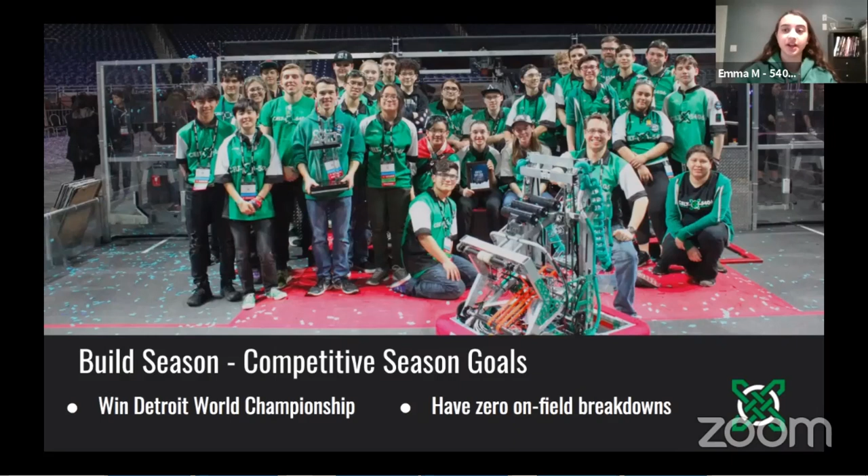Hi, I'm Emma. I'm in grade 11. I work on design and manufacturing, and I'm also the operator.

This year our team had 2 main competition season goals. Every year our goal is to be one step further than we did in the previous season, and last year we actually had a goal to make it to Einstein's.

Not a lot of people know this, but after Ontario District Champs, I decided that we were going to win Worlds, and nobody took me seriously until we almost made it there. Unfortunately we didn't, but that became a goal this year.

To field the most competitive robot we could, we also have a goal to have 0 on-field breakdowns. We do this by systems checks before every single match to make sure we don't miss anything and our robot is running as smoothly as possible.

Go on to the next slide, please. So the workspace that we build out of is the Robodrome, which is a shared build space given to us by our board. It's outfitted with a full machine shop and a nearly full-size practice field.

We worked closely with the school board to outfit the Robodrome and shape it into what it is today. We secured grant money and outfitted the machine shop with a bunch of complex machines, like a CNC mill, a router, a laser cutter, stuff like that.

Since this building is a shared board building, it serves as a workspace for the multiple FRC teams in our board. However, we invite teams from all across Ontario to come and practice with us and use our facility. All we ask of them is for them to bring us a team shirt, and we will display that on our t-shirt wall. As of now, we've collected over 20 t-shirts.

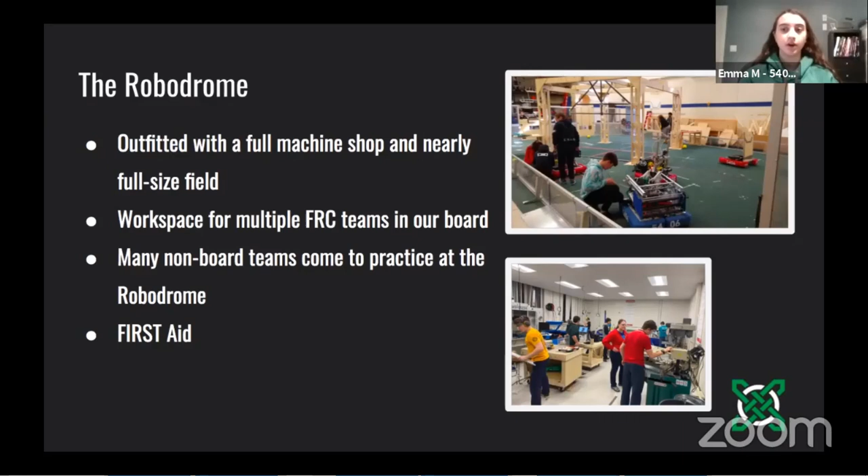Yeah, we definitely encourage teams to ask for help when they need it. For the bigger machines, if you're not trained, it would probably be one of our teammates helping make your part, just for safety reasons. Either way, that's a great option for teams, so thank you for doing that.

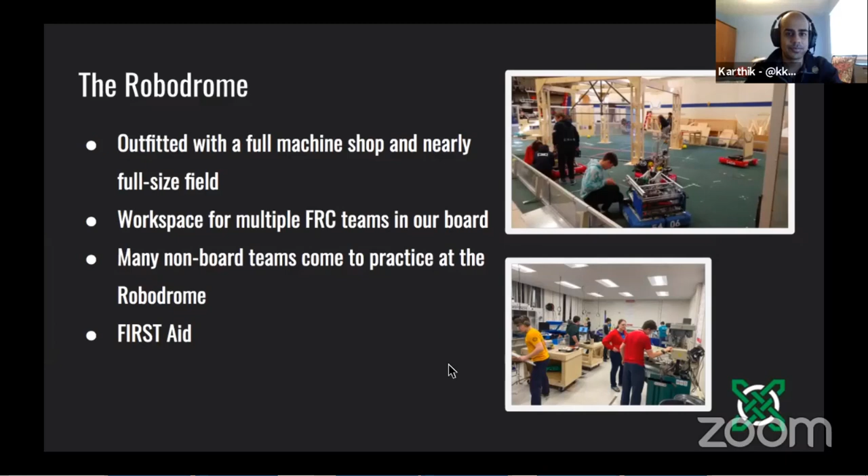Hello, I'm Andrew, also in grade 11. I do mostly mechanical and design.

Going into build season, our main strategy is to first figure out all the rules in depth about this year's game and how it can be played, in order for us to be able to try and figure out every single possible play or cycle the robot can perform during a match. Then we try to figure out how valuable that cycle or play could be based on how much time it takes, how many points it gets us, and how difficult it would be to do.

In order to do this, we also have a human game to make sure we understand it fully. We have 3 tiers of robots, with our teammates acting as the robots: the Brave Little Toaster, an average Ontario team, and a World Championship winning team. We figure out how they would affect their alliance scores, what kind of robots they would be, and how they would play the game.

This year, we estimated an average game would be around 80 to 100 points, and we hoped by the end of the season we could contribute 150 to 200 points to our alliance.

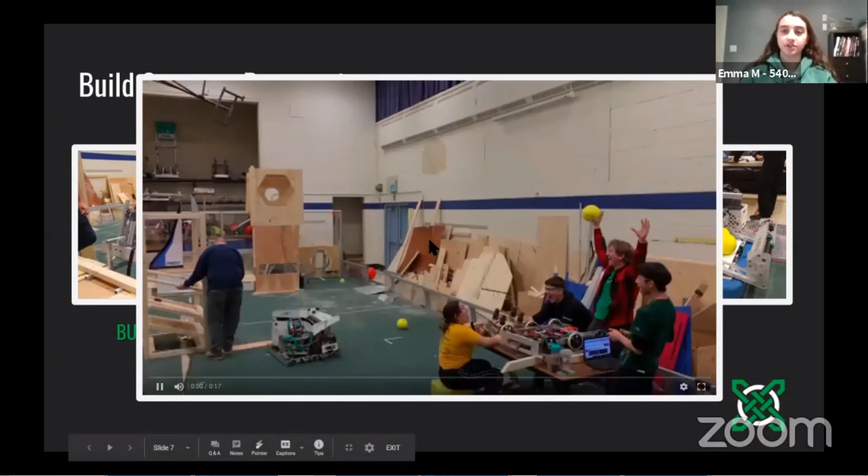If we could play the video: this was on, I think, day 4, the first time we got a power cell in the inner port. By day 5 we were prototyping our hooded shooter.

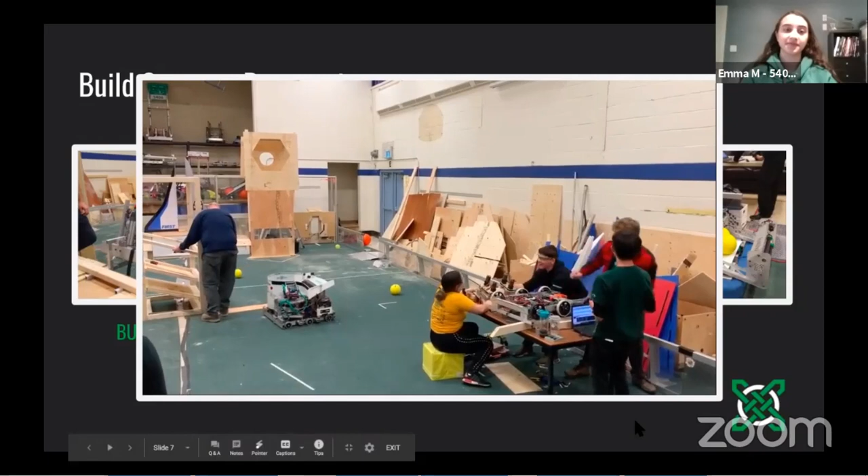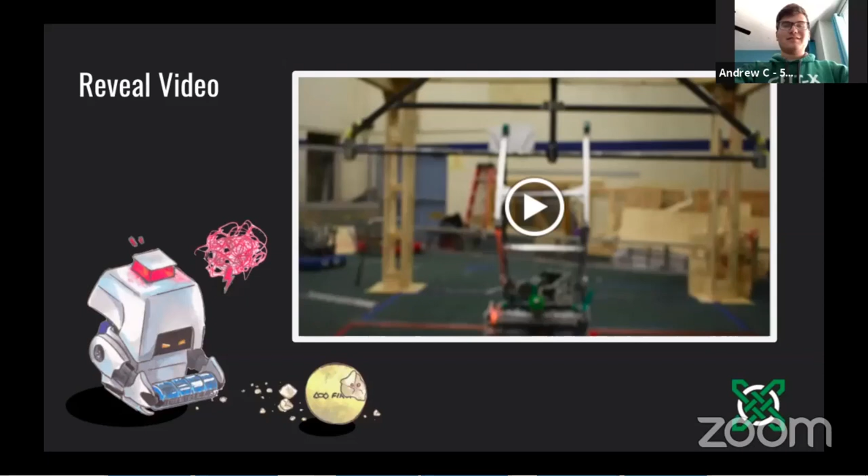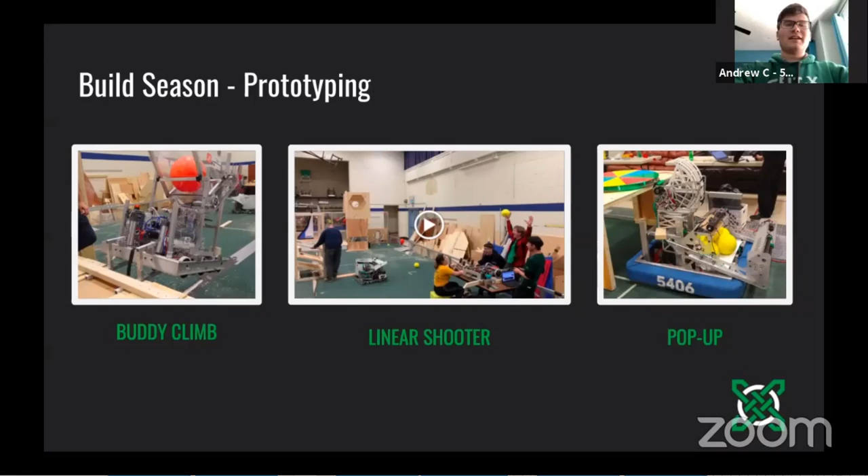One of the last main things we prototyped was mounting our shooter on top of a lifting mechanism, in order for our short robot to be able to shoot over the top of the control panel into the power port. After further design, we realized it was a bit too difficult to fully incorporate into our robot. It was also a bit heavy and we did not have the weight for it, so we decided to go with a simpler option of just driving under the control panel a few more feet to get similar time shots.

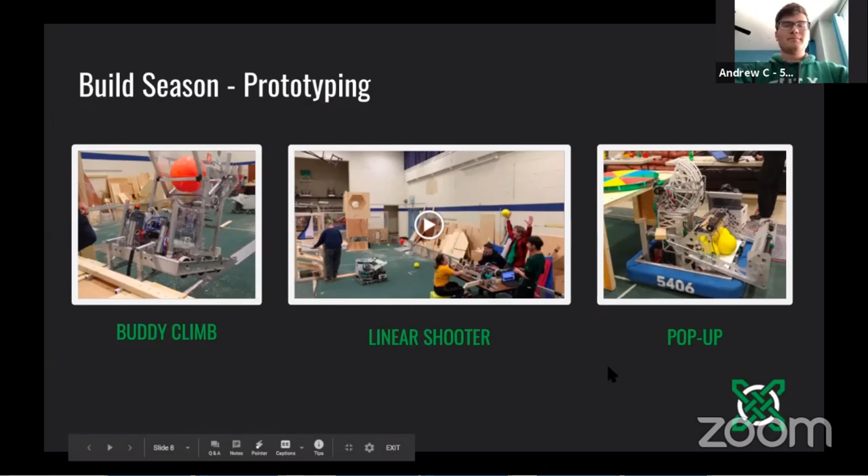This is our reveal video for this season. We named our robot Mo because it looks like the microbe obliterator from WALL-E. There's a little picture there.

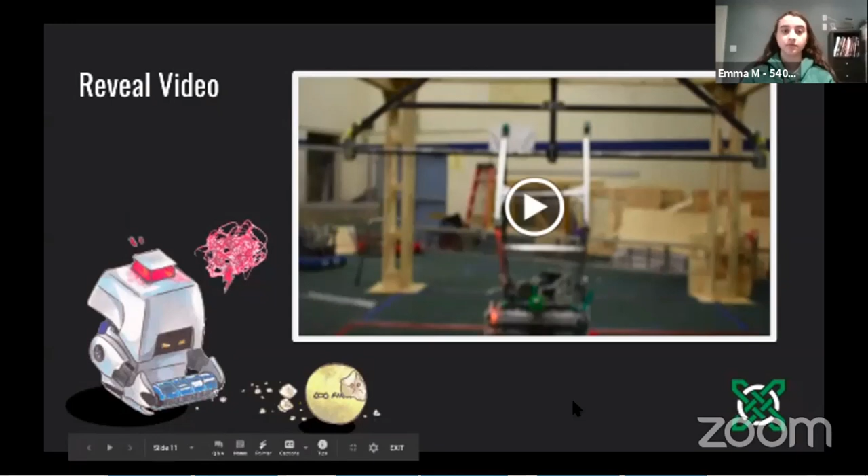So that was our 2020 robot, Mo, and we're just going to be going through Mo and talking about some of the mechanisms that can be found on Mo, except for the color wheel spinner, because that didn't quite make it on in time.

Victoria, I want to share one comment we have from chat: I thought you named your robot after the superintendent from the HWCDSB who's responsible for robotics and STEM. That comment is from none other than your superintendent, Morris. Thank you, I think it's a pretty good story—I think you should go with that one. Oh, man.

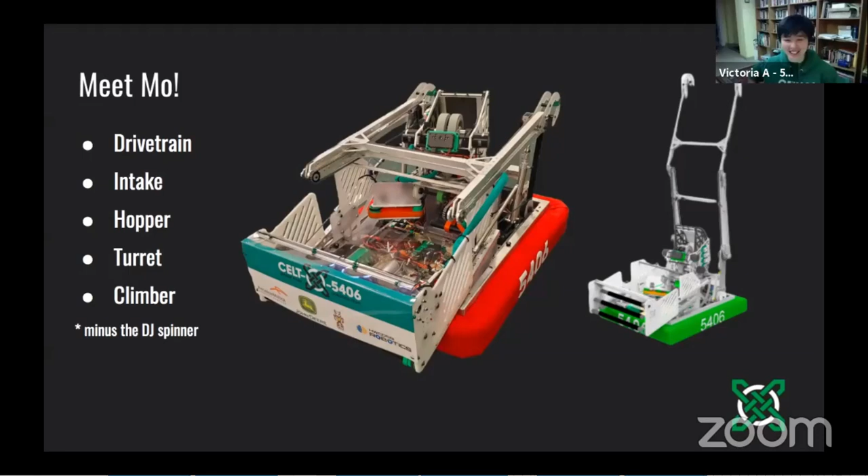Okay, so this year's drivetrain is a 6-wheel single-speed West Coast drive. It has four NEO custom gearboxes, and our gearboxes and rails were made on our CNC router.

Danny demanded this year that we have base lock since it's a shooting game. If you're not familiar with what base lock is, it's when you set the wheel PID to continually correct for the last position you were in. So if you get knocked around a little bit, the wheels will continually try to correct to where you were last, so basically the drivetrain is locked. This is useful for shooting and to combat defense—you don't want your shot messed up while getting defended. So base lock is just a way to combat that.

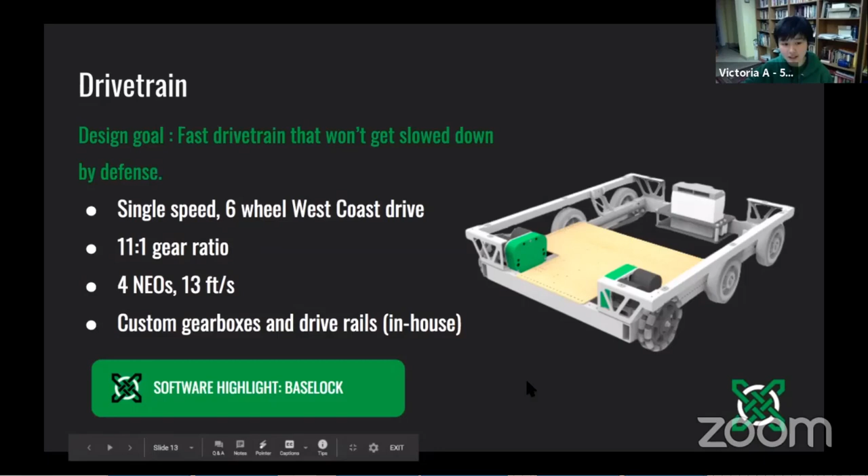Our goal when designing the intake was to make one that can efficiently pick up as many balls as it can in a short amount of time. What we came up with was a full width intake that can pick up 3 power cells at once. It's cut out of HDPE plates laser cut in-house, featuring custom 3D printed pulleys mounted on our rollers. Our intake also moves in and out using pneumatic cylinders and bearing sandwiches, which allow it to extend out and intake from the loading station.

We pulse the rollers while we're shooting for two reasons. One, so the balls don't get jammed—they get to shuffle around a little bit. Second, our hopper is just gravity; it's slanted into the robot, but there's nothing actively pulling the balls deeper into the feeder and into the turret. So we need to pulse the rollers to push the balls back there.

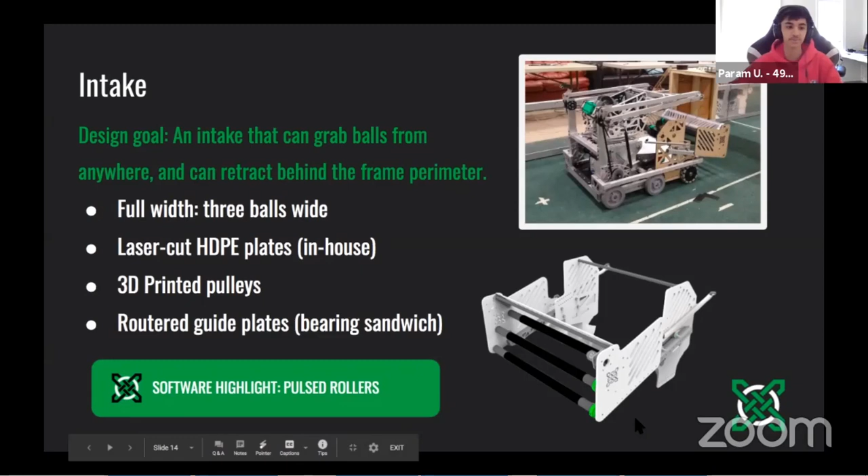I just wanted to mention a point brought up in the chat—it says this was the most redesigned part of the robot. Want to shed some light on why that was? For the most part, it was trying to make sure the power cells weren't getting jammed. A lot of our original designs had issues with power cells jamming on the side parts of our intake where it leads into the hopper, as well as efficiently getting them through the hopper into our shooter. So we had to spend a good few weeks constantly redesigning and making minor changes to it.

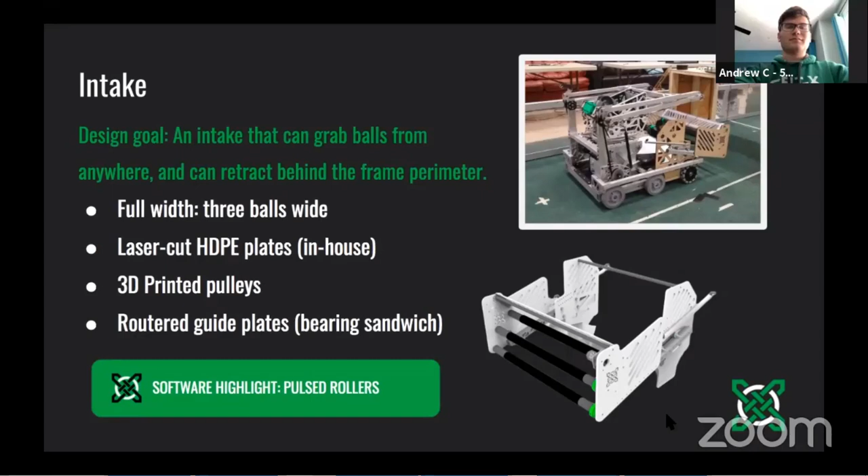At first, when designing our hopper, we decided to test out using brushes. After multiple attempts of trying to get them to work the way we wanted, they were slowing us down quite often, and sometimes the power cells would get jammed between the brushes. So we decided to remove them in our final design, as we were able to run without them.

In order to avoid jamming power cells when feeding them to the turret, one side of our serializer actually spins 10 times faster than the other, so that one ball is pulled in at a time. Our feeder is actually two parts: a wheel that pulls the ball in from the serializer, and powered rollers that prevent jamming. It used to be a Lexan sheet, but the balls like to stick to the sheet and each other, so powered rollers prevent that.

Our feeder is also velocity controlled. We don't pass the balls when the flywheel isn't spinning up or actively powered, because then it just jams. We also have a security mechanism where we limit how quickly the balls pass through the turret, and since it's velocity controlled, it limits the max RPM rate.

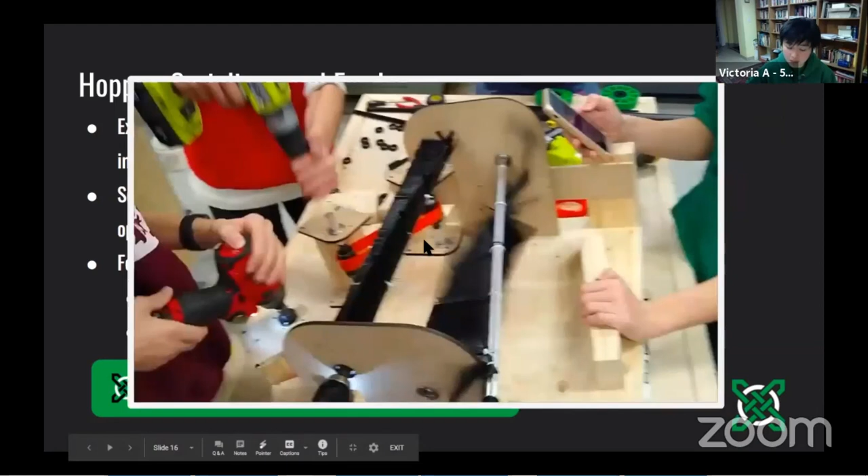One. That one had like a bit of...

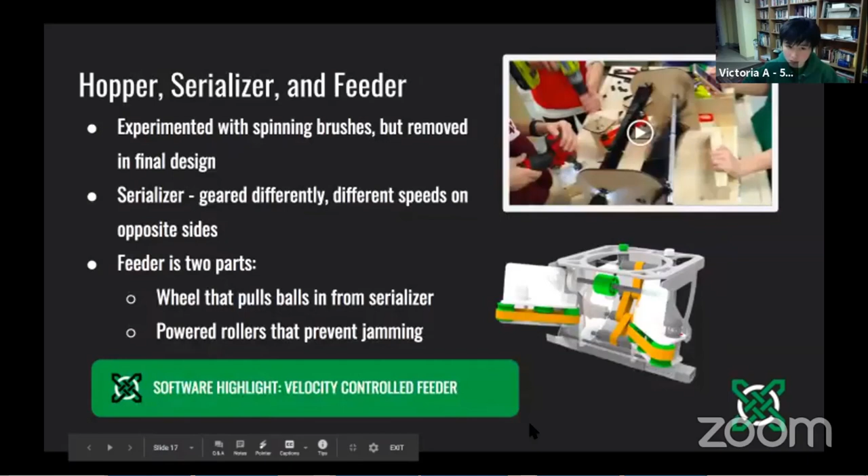So the cool thing about our turret is it's basically all made in-house. We have the delrin on the sides laser cut. The aluminum plates at the bottom are made on our CNC router, and we have the motor controller and limelight mounts that are 3D printed.

We have about 300 degrees of rotation and about 90 degrees of hood motion.

So the turret has the coolest software stuff by far, I think. We have two absolute encoders, one on the turret itself and one on the hood. So if we brown out or lose comms for a moment, we can always find our zeros, and we can find our zeros from any arbitrary location.

We also have auto targeting with the limelight. We have a quadratic regression, so we can find the hood angle and RPM of the flywheel from anywhere on the field using the TY value from the limelight.

And we also installed soft limits. So we have about 300 degrees of rotation, but that's a conservative number, because we installed the soft limits to make sure we don't break our umbilical while we are turning the turret.

It's worth noting that we could actually turn 360 degrees if we wanted to. It's just a matter of extending our umbilical, because in our practice bot we can turn 350 degrees. So that's something cool about that.

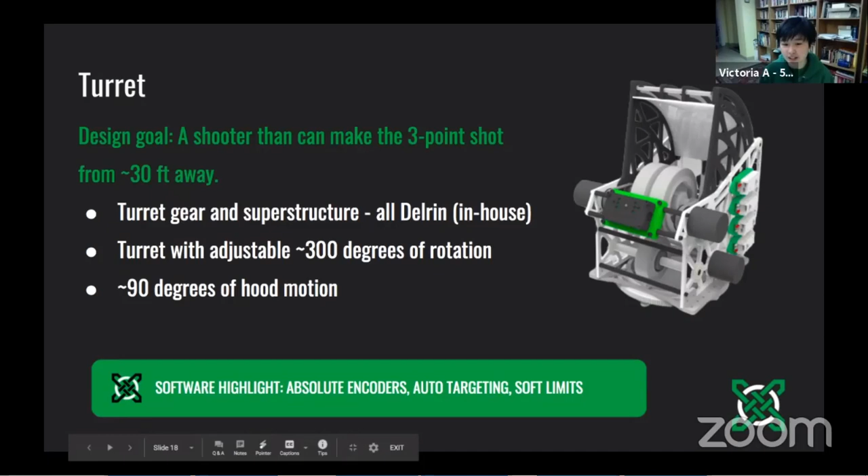Originally we had two individually powered linear bearing arms, but they didn't package well and were on the heavy side. They weren't working the way we wanted them to. So instead we have a virtual 4-bar linkage, actually powered by only one Neo because we ran out of motors on our robot, and it locks with a bicycle brake, which we took from our 2015 robot.

So we actually have an automated climb. Do you want to play the video? The driver just has to line up to the switch and then press a button, and the arms go to an arbitrary height.

Then the operator from there can adjust the arms and press another button and we're climbing. So that's our automated climb, but we also have a manual climb just as a backup. This is also to achieve our goal of 0 on-field breakdowns. It's good to have the manual just in case the automated fails for some reason.

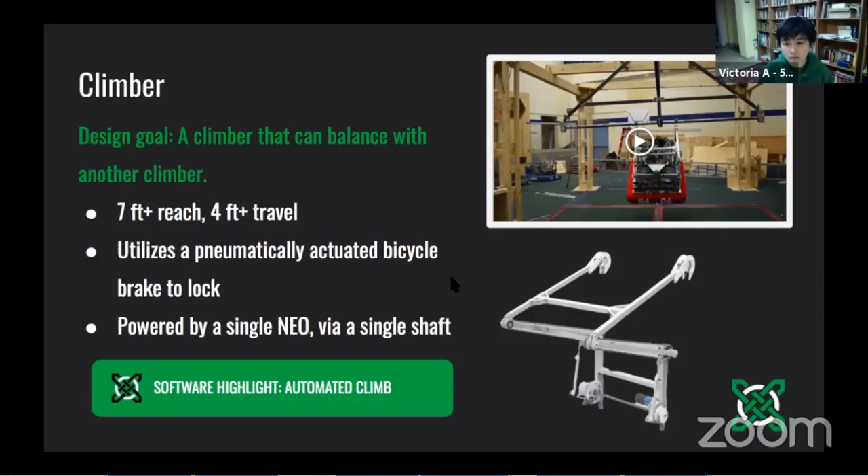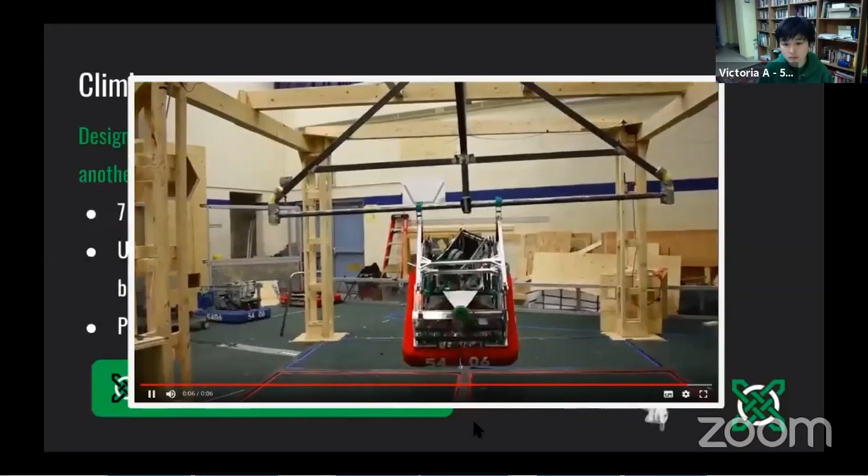So here are a bunch of electrical things that we think are cool and really want to highlight. In 2018, we stopped using Anderson connectors on our CAN because we used them out of spec, and that caused two different failures in 2018. One of them was our 2018 robot Tipsy throwing a cube over the driver station wall.

So we didn't want that to happen again because there was a wire break in the Anderson, in the umbilical. So we switched to IDC connectors, which are in spec for CAN. Our umbilicals, we have 2 on our robot, 1 going up to the turret and 1 on our intake, and it's just a nice way to keep all of our cables together and organized.

We also use DIN rail on our belly pan with custom 3D printed mounts that just clip on. It's really easy. In between matches, if something's broken, we can fix it right away.

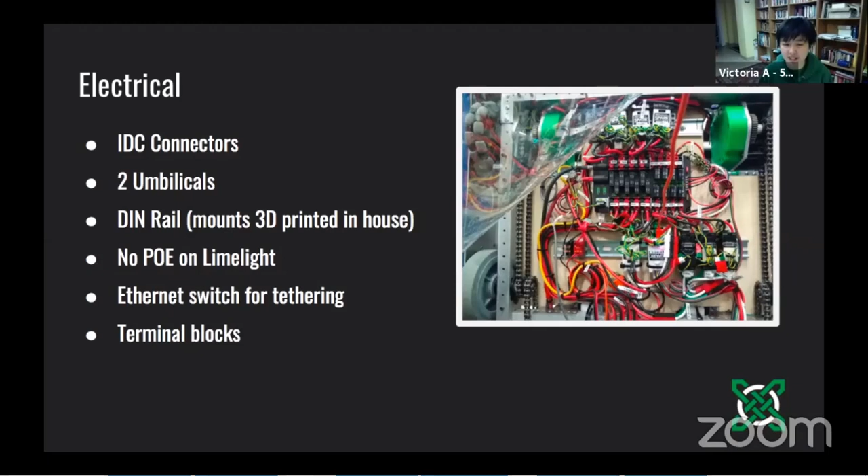We stopped using PoE on the Limelight because it introduced more points of failure. You could lose the Limelight if the Ethernet was just slightly off. So we found that wiring straight to the PDP was a better solution.

We also have an Ethernet switch to further that 0 on-field breakdowns goal, so nothing has to be unplugged when we tether on the practice field. And we used terminal blocks this year because 15 slots on our PDP were used by motor controllers and we still needed to power the encoders and Limelight.

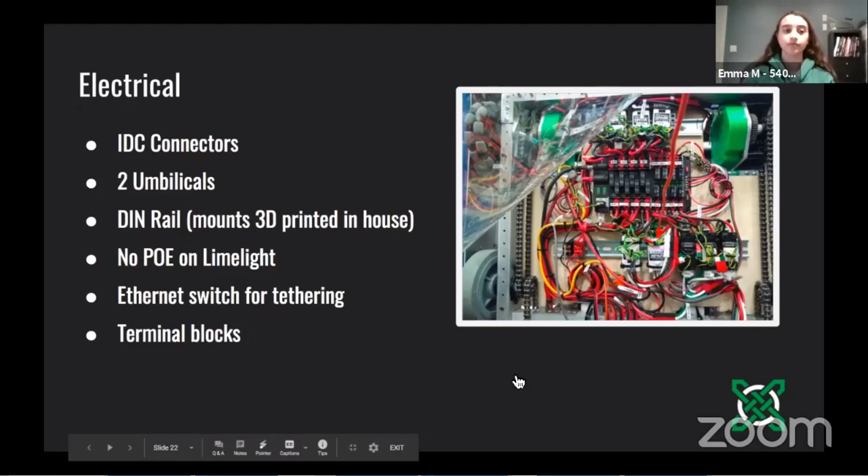So through the terminal block, you're able to power the Limelight and the encoders. How's that set up? The encoders are on the terminal blocks. The Limelight is in the PDP. So the terminal block goes to the VRM? I think it's wired straight to the PDP, I could be wrong on that though. But which slot on the PDP? The 16th one. So the Limelight and the terminal block are going to... I'm just trying to capture how you're getting all of that into the PDP. Is it all going into one slot on the PDP? It's going into the terminal block, which goes into the PDP. So the Limelight's not going directly to the PDP, it's going to the terminal block. I'm pretty sure, yes. Okay, cool.

Our design goal for autonomous this year was to have a path following program that could get us a reliable 8-plus ball auto. In 2018, we had great path generation but terrible path following. In 2019, we had terrible path generation but great path following. So this year, when WPILib released the Ramsete controller for path following, we decided that was the best of everything and we wanted to use that.

We used the Ramsete controller for path following and trajectory generation, along with the new encoders on our drivetrain and the NavX. We utilized sequential and parallel commands to make the best use of our time and avoid idling where we didn't need to be. Sometimes we also utilized driving while shooting—it's not in this video, which is our 8-ball auto, but we use it in our 7-ball auto. These were starting points just implemented to see whether they worked, and they do work. We wanted to use it later for 9 and 10 ball autos, but that never happened because the season ended.

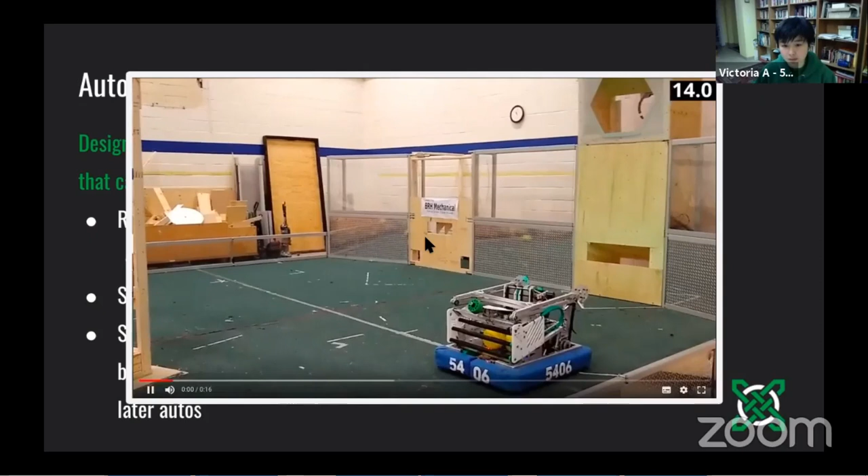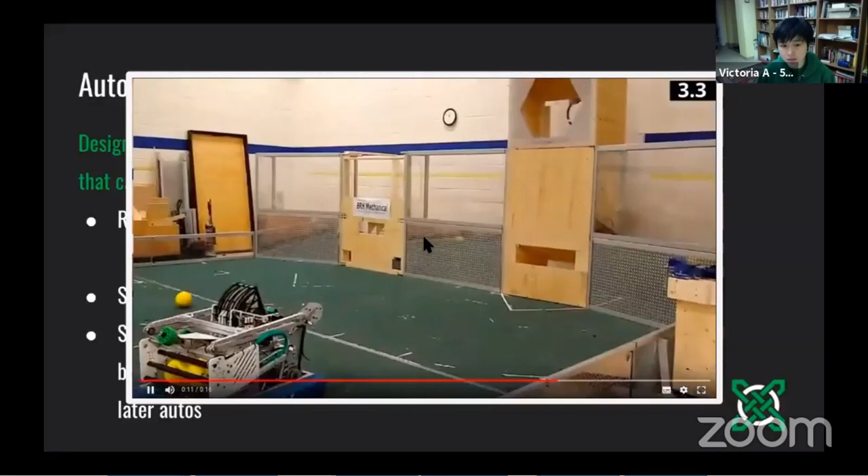Going back to the electrical for a second, you talked about how you stopped using Anderson connectors because they're out of spec for CAN. What spec is this? I think this would be a really cool thing for our audience to know, if teams are actually using Anderson connectors incorrectly. I think if I remember correctly, Anderson connectors are too large for what we were using.

Too large according to what, though? The gauge of the wire—the gauge of the CAN wire was too small to be using with Andersons. So you stopped using Anderson connectors just on your CAN wires, not across the whole robot? Yeah, we still use them for other electrical connectors. We just use IDC connectors on the CAN.

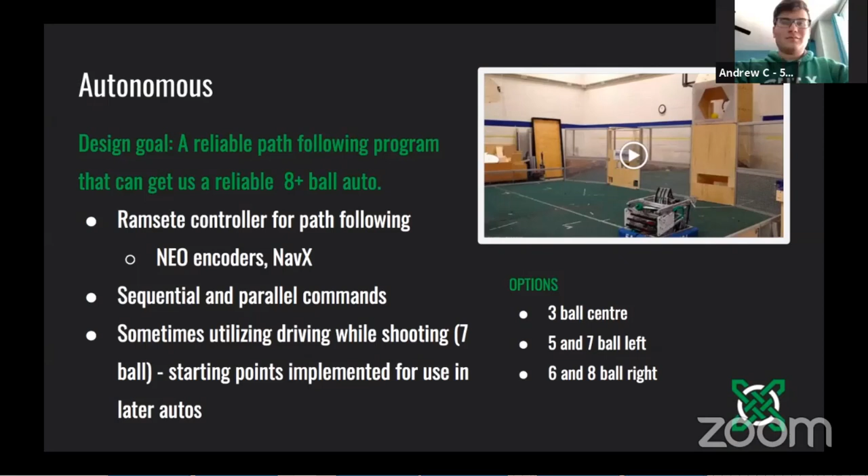Here's a question from the Twitch chat: why did you decide to use Omni wheels if you already have a center drop from the West Coast drive? Does it help with the turning even more, or did you find the drop alone wasn't enough? Yeah, it helped with the turning. The Omni wheels actually got quite destroyed on the rendezvous point, but it was very helpful for controlling how we turned, especially when there were a lot of power cells on the field and we only wanted to be picking up five. We found it was better for control.

How much drop did you have this year? An eighth of an inch.

How was your hood actuated—was it just pneumatic, 2-position, or fully adjustable? It was fully adjustable. The gears were custom cut on our laser.

That's just a fabulous robot. It's another one of these robots that we see on the show where it's just like, man, I really wish I got to see it play. I hope we will have that opportunity at some point, hope the world is more under control and we can get back to playing robots, because that would be amazing. This is one of those ones I really, really want to see on the field.

For you, Celt-X, what was that feeling like when you found out the season wasn't going to happen? It was definitely upsetting, I was looking forward to competing. I know it's kind of out of our hands. I just hope we eventually get to end up playing with the robot.

Are any of you seniors, or grade 12s rather? We're all in grade 11. So you're all back for another one. Yeah.